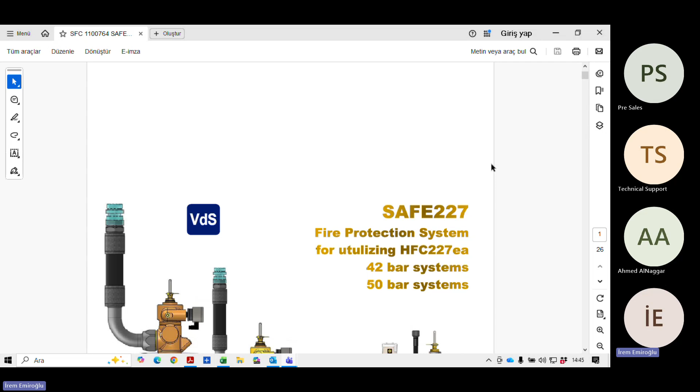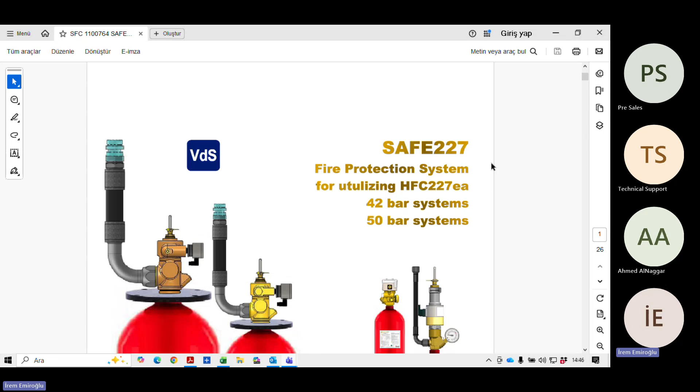This is our SAFE 227 system technical catalog. Actually, one of the technical catalogs with a certain product line, but this is the product line that we are going to work with you. We have our system approval with VdS, so in case you want to deliver the systems with the system approval, we will be able to supply you a VdS system approval.

Otherwise, we also have the same product line with UL approved components. However, in the UL case, we didn't receive our UL certificate yet, we will work on it. So we are not UL system approved, but we have the valves, actuators, and cylinders with UL approval, so we can deliver components approved products as well.

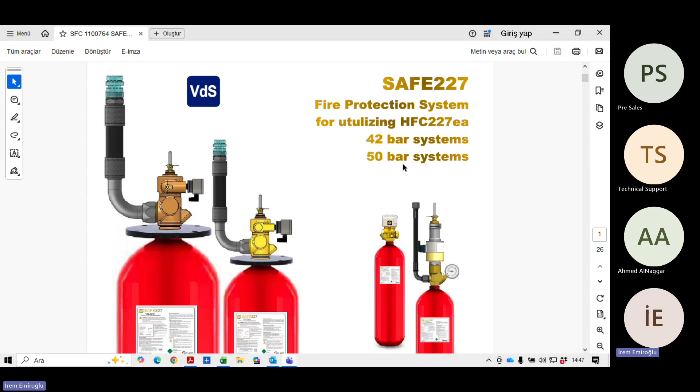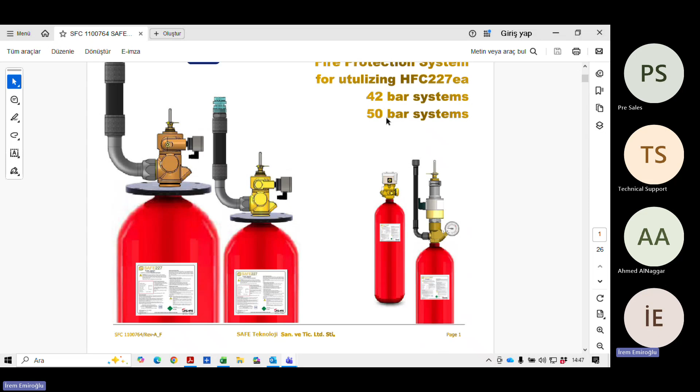But today we are talking about VdS system approved products line. So we have two different system approvals: one of them is working under 42 bars, the other one is 50 bars. We are working with high pressure seamless steel gas cylinders, meaning our cylinders are not welded, and we are not working at 25 bars working pressure - we are working at high system working pressure.

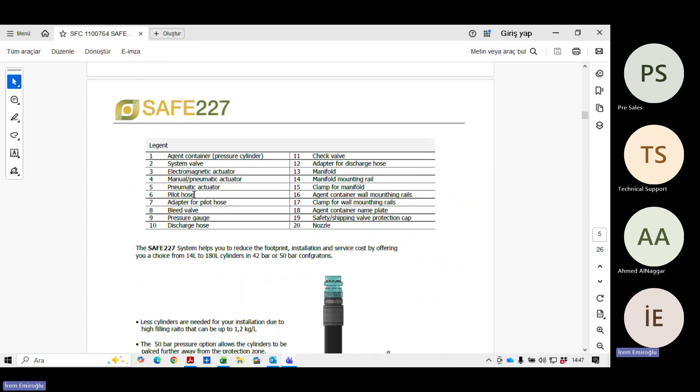So if you follow the technical catalog, you will find our system components here. And if you go a little bit lower to the 6th page, you will find our cylinder range. Our cylinder range starts from 14 liters up to 180 liters - so we have a pretty good and high range of cylinders: 14, 27, 30, 50, 75, 80, 120, 140 and 180 liter cylinders.

Here you can find the cylinder capacities as well. You can find the cylinder heights and the cylinder diameters here. We have different configurations with these cylinders.

As you can see, the 14 and 27 liter cylinders are our smallest system capacity. With this smallest system capacity, we designed two different product lines: one of them has the system valve with the electromagnetic actuator integrated, and one doesn't integrate the electromagnetic actuator. This creates an easy selection between two systems - I will explain on the bottom.

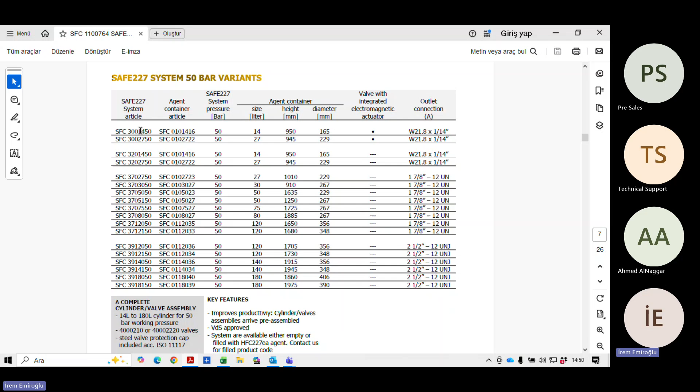In this page you can see the stock codes, the article codes of the cylinders with 42 bars system pressure, and we have the same product line for 50 bars of system pressure, same cylinders and same mentality I explained to you. But if you want to check together with the article codes and the system codes, you can always check from here.

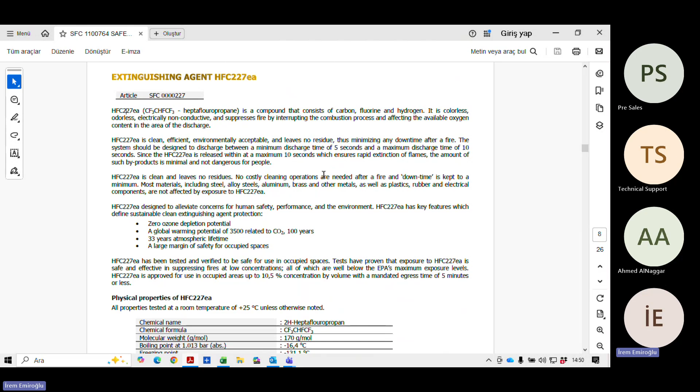If you would go through the technical catalog, you will always have the information about the extinguishing agent, but I'm sure you already know about HFC227ea clean agent. If you have any questions, we can talk later on as well.

For example, let's say for a 50 liter cylinder, on the lowest you can use 20 kilograms of HFC 227EA, but at most 60 kilograms of HFC 227EA. I find these quantities, the minimum quantity very minimum and the maximum quantity very high.

So this is not a safe zone to use. Instead, I would recommend you to always try to design the filling ratio around 80 to 90%, because I'm sure you also have a similar problem. When we are preparing a quotation, we don't have the architectural design of the hazard, and we don't know exactly where to locate the cylinder and how the pipeline will be. So we need to stay on the safe side, first trying to quotate for the system capacity. So I would never recommend to fill a cylinder even 100% or more.

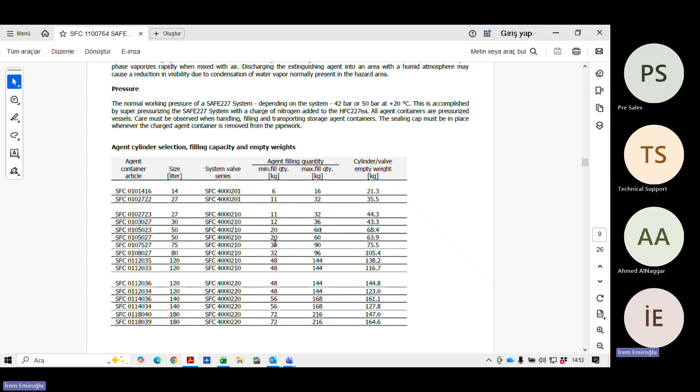This table works more if you know about the architectural design of the building, if you know more about how to locate the cylinder, and if the hazard is really easy to install with an easy pipeline. Otherwise, it would be better to stay on 80% filling ratio, which I'm going to explain you in the configurator part, but I hope you can also follow up.

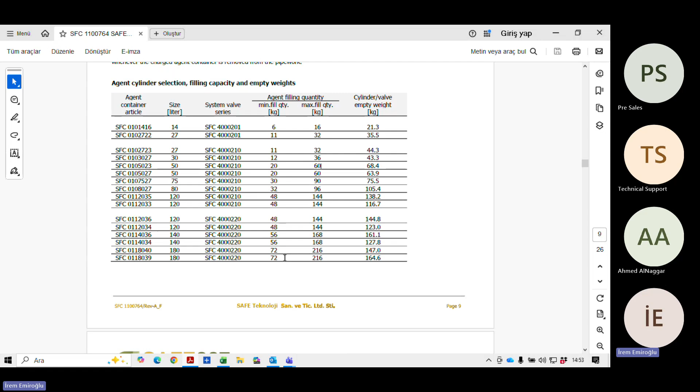I want to check if you still can hear me and if everything is going okay. Please give a heads up for me if you're okay. Everything is okay? Yes, okay great. Please ask me anything if you want to stop me.

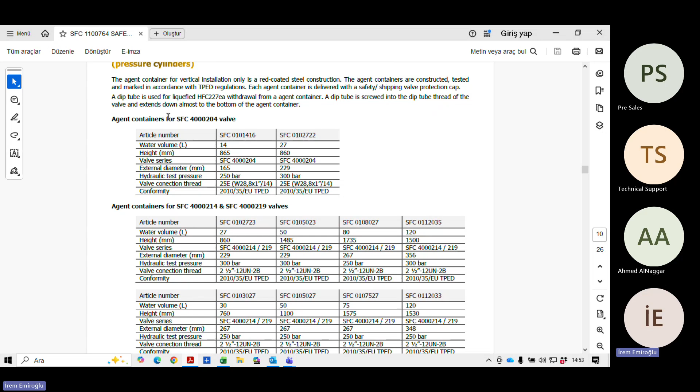On this page, you can find the agent containers and the agent container valve configurations. As I told you before, we have actually 3 different product groups. Let's say 14 and 27 liter cylinders. Here you can always see the valve connection thread, so you can understand that these cylinders have a very particular and small valve connection. So we are using a certain valve for this product group.

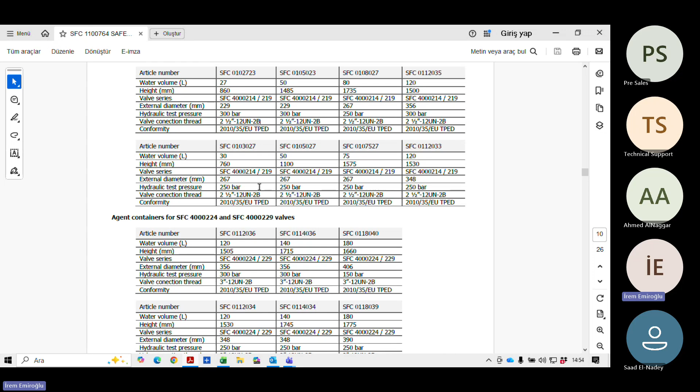Here on the second part, you can see the valve codes, starting from 27 liter cylinders until 120 liter cylinders, we are using the DN33 valve connection valves. And regarding starting from 120 to 180 liter cylinders, we are using the DN50 valve group.

I want to explain why we have so many cylinders in this chart. Maybe you noticed, for example, there are two 50-liter cylinders here. There is an 80-liter cylinder, but there's also a 75-liter cylinder, and there are two different 120-liter cylinders. With Mr. Ezat, we also worked on this, but I will explain you.

Under our system approval, we have different cylinder manufacturers. One of them is our own factory, which is CMV Cylinders Factory, a Turkish and Italian joint venture, and we are producing in our facility in Turkey. We are actually the main supplier of many system producer companies like JCI, Minimax, Rotarex, etc. We are a European cylinder manufacturer facility as well on the other side.

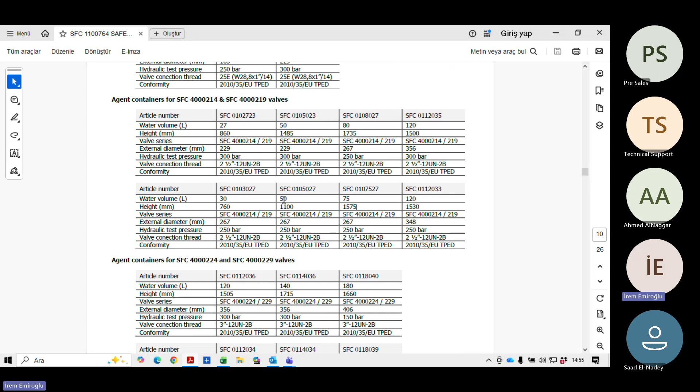So here you can see on the second line, CMV cylinder production line, as well on this valve group. Also, you can see on the second line, the CMV cylinder production group. On the first lines, here you see 27, 50, 80, 120 liters. And here you can see 120, 140, and 180 liter cylinders.

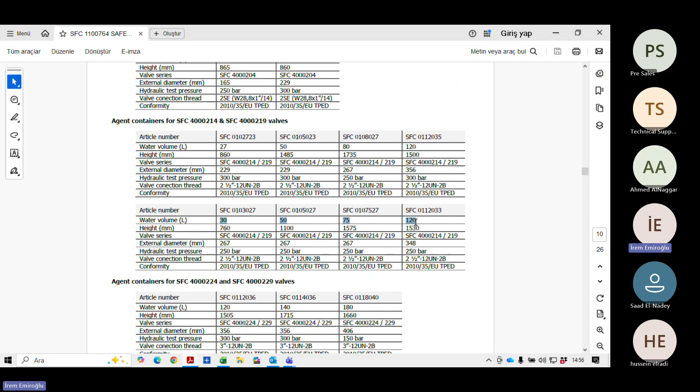This product group belongs to one of our Chinese manufacturers, a cylinder manufacturer, with whom we have an agreement for all our product groups. Because of customs tax and commercial concerns, we were talking about our own production line cylinders with Mr. Ezat. That's why we have so much cylinder capacity in our product group.

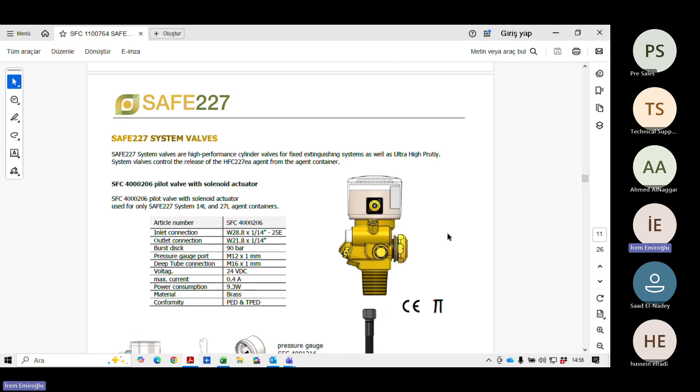Starting on page 11, you can find our different valve groups which we have talked about. Here you can see 14 and 27 liter agent containers, and the 25E thread connection valve product group. As we mentioned at the beginning, we had two different valve groups for both cylinders: one with integrated solenoid, and the other without solenoid integration, which was basically a discharge valve.

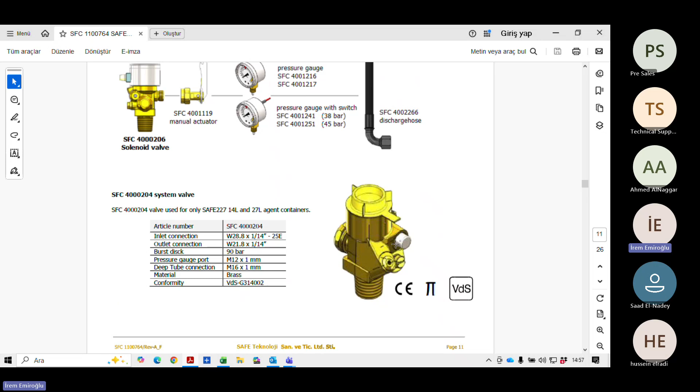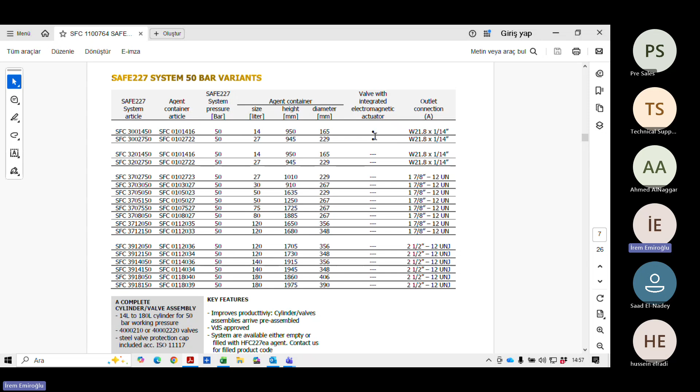I can remind you where I explained this at the beginning. I think you remember this part - I told you we have two groups with the same size of cylinders. One has the valve with integrated electric actuator, the other doesn't. So on page 11 you can find these two different types of valves: this is the one with solenoid integration, and this is the one without, which is under our VDS system approval.

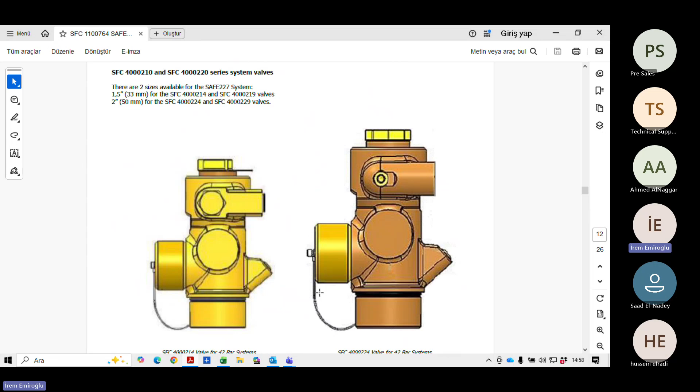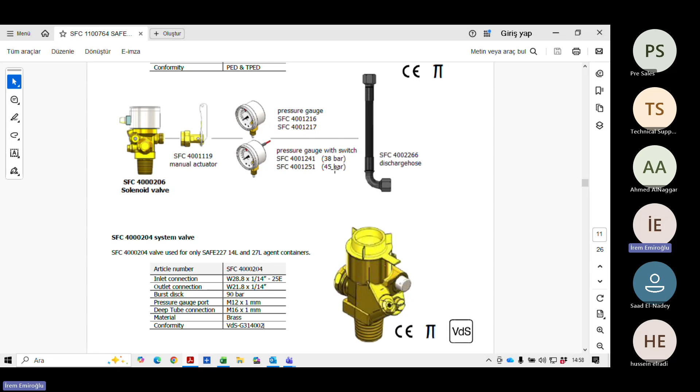Now let's talk a bit more about the configuration of this product. In case we use the solenoid integrated valve, we just need one manual actuator, and we need to decide between the pressure gauges. If we want a pressure gauge with contact switch, we can choose - we have two different contact switches, 38 bars and 45 bars. This one is for 42 bar working pressure systems, this one is for 50 bar working pressure systems. We also need a discharge hose to discharge the system.

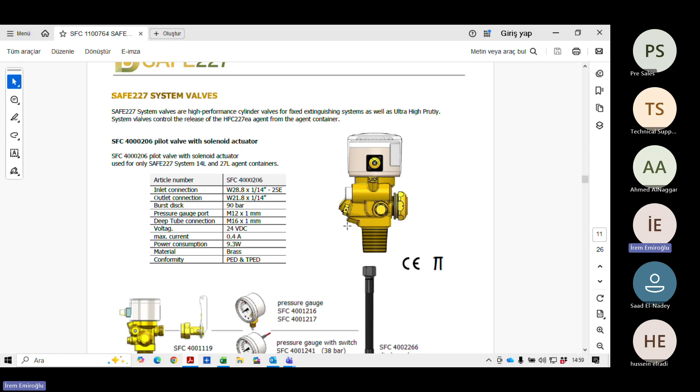If we want to use this valve - basically if we are quoting for a VDS approved system with 14 or 27 liter cylinder - it means we are going to use this valve, and we need to also add a solenoid actuator, which will be here on the lower part that I will explain. So let me go to...

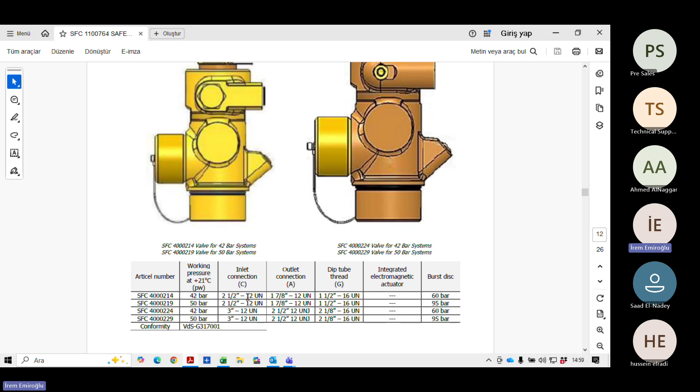the bigger cylinders configuration. As we discussed, we have two different working pressures, 42 bars and 50 bars, under our VDS conformity, and two different valve groups - one has DN33, the other has DN50 connection. Here you can find the DN33 and here the DN50 connection valve. This valve works for our 27 to 120 liter system capacities, and this one works from 120 to 180 liter capacities, so they are divided into different product groups.

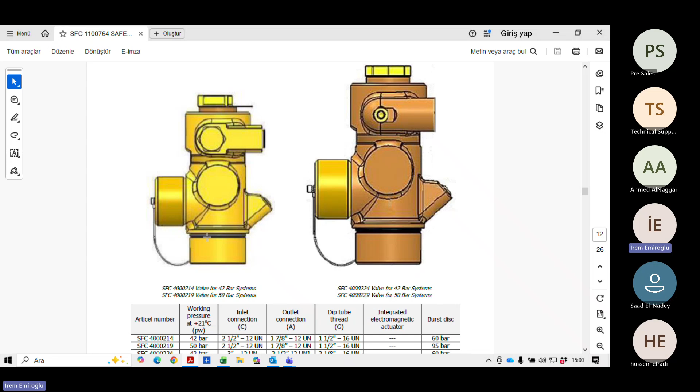As you can see, these valves are only discharge valves, so they don't have any integrated solenoid actuator. We are going to add a solenoid actuator for our pilot cylinders. Here you can see the configurations - this is page number 13.

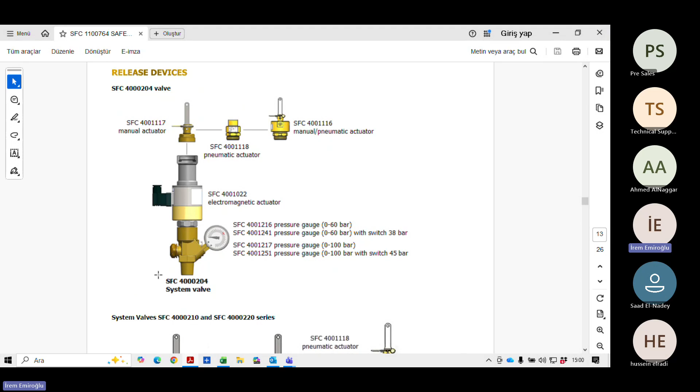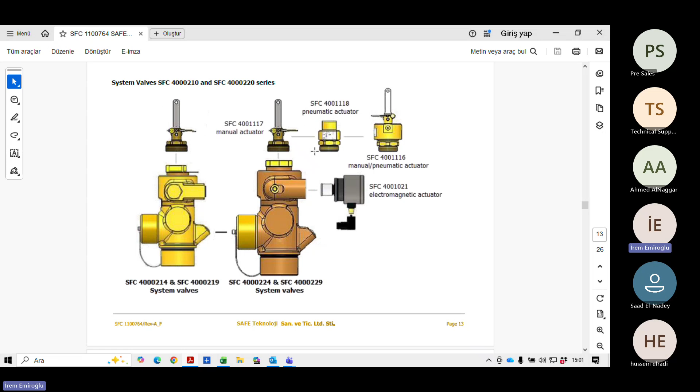So for DN32 and DN50 connection valves for the cylinders, we have the system valve and the manual actuator, which will be added on top, and we will have the electric actuator for the first cylinder under the manifold, under the battery - this is the pilot cylinder. Regarding the second, third, fourth, and other cylinders under the same manifold, we have the pneumatic actuator connection. That is basically the valve connections.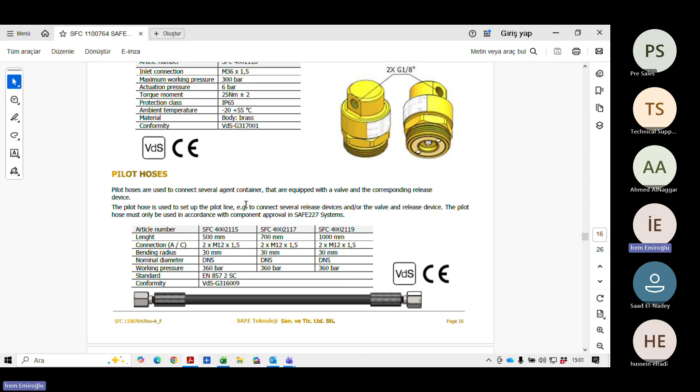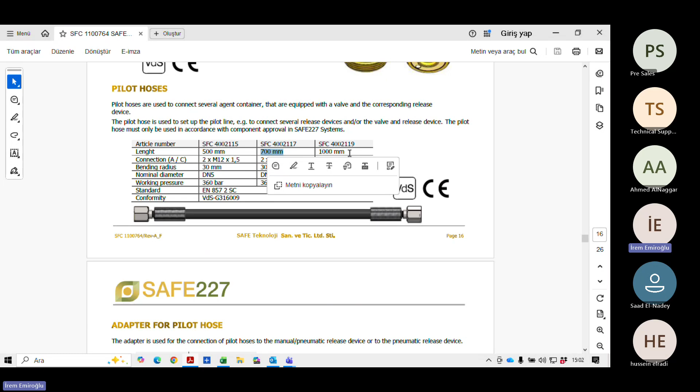Regarding the second, third, fourth, or however many other cylinders are under the same manifold, we will use a pilot line between the pneumatic actuators of the second, third, fourth cylinders. This is the pneumatic hose, which comes in three different lengths. This is suitable enough, actually - these longer pilot hoses will be required for different and specific situations.

So basically, this is what we need to talk about at the beginning. Here on page 18, you can find the detail of the pressure gauges that we talked about.

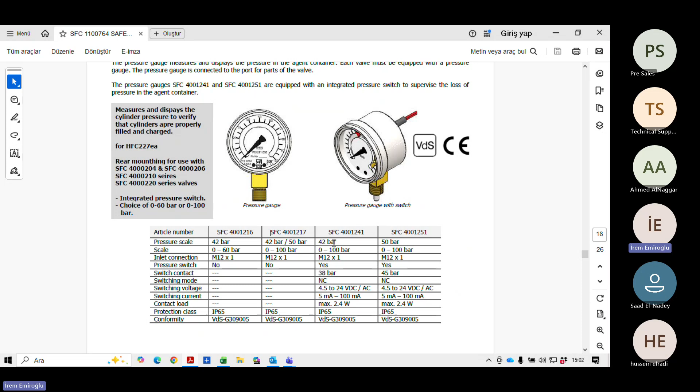For the 42 bar systems, you can find the pressure gauge alternatives here. The scale is changing, and regarding 42 or 50 bar systems, if we need to use a switch contact, you can find the switch contacts here, normally closed. All these product lines are also VDS approved.

There's a difference if you want to work with UL approved components - you always need to choose a pressure gauge with the contact switch. This is the necessity of UL. UL doesn't have the alternative which doesn't have any switch contact.

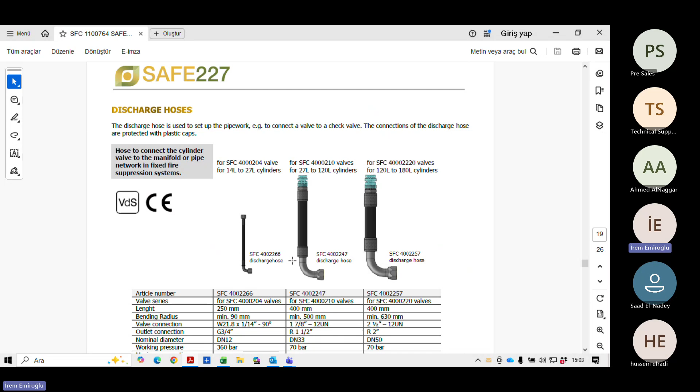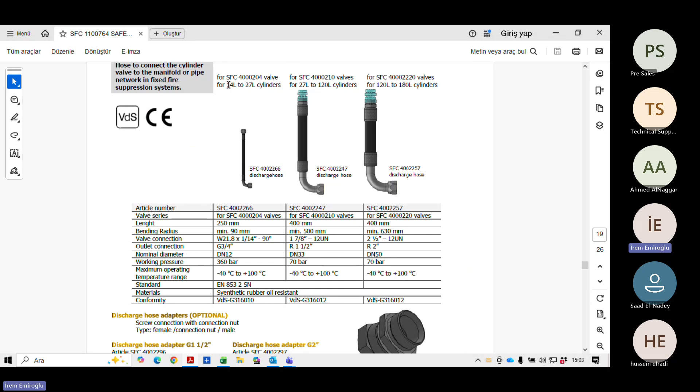Here you can find the discharge hoses. We have talked about 3 different sizes: DN12, DN33, and DN50 valves. As you can see, 14 to 27 liters, 27 to 120 liters, 120 to 180 liters. So 3 different product groups are here as well.

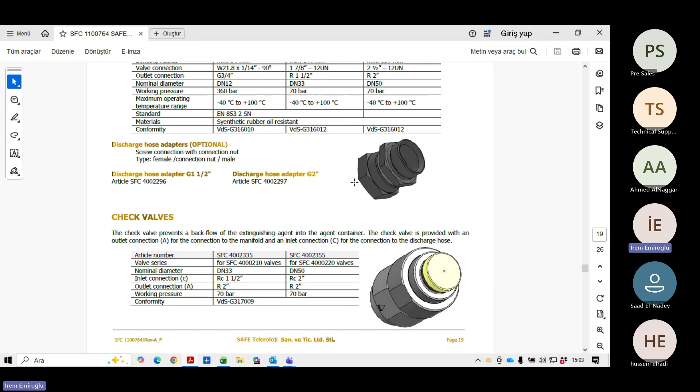We have different manifold configurations. Mr. Ezat told me that you're not going to purchase any manifold groups from us, but you can always check from here. We have different alternatives we can use for 2-port, 3-port, or 4-port manifold groups.

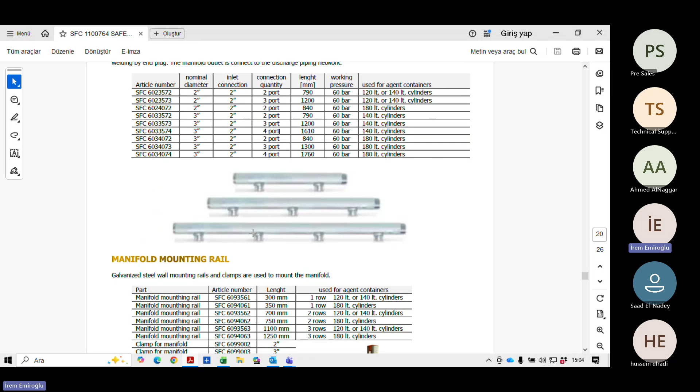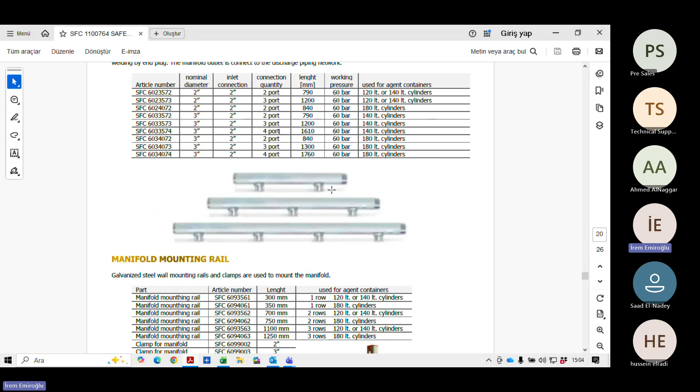If we need to install 8 cylinders in one hazard, then we can use 2 pieces of 4-port manifold, or we can use 4 pieces of 2-port manifolds. It depends on your design, on the architecture of the hazard, depending on the pipeline that you would easily install. You can decide, or we can support you technically.

You can always find which manifold connection is going to be used for which type of cylinder groups here.

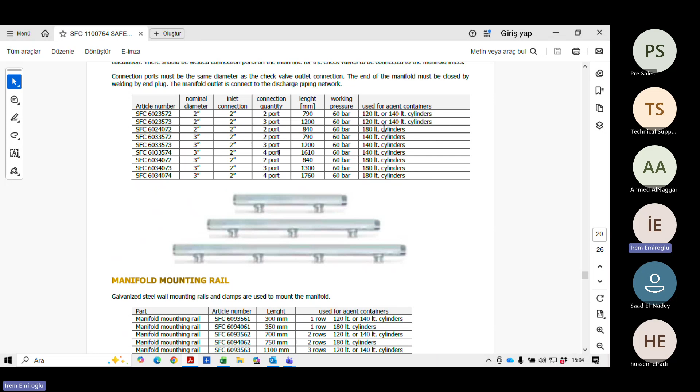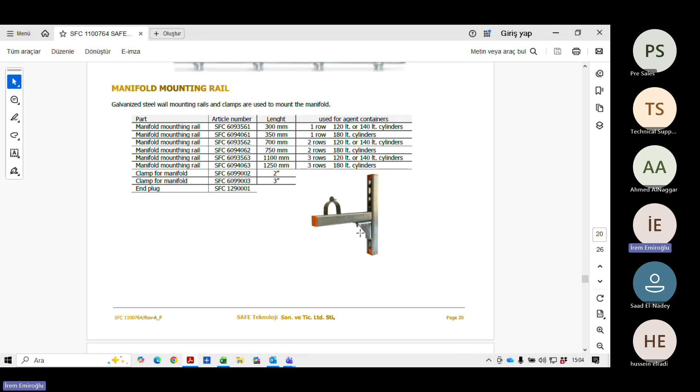Here you can also find the mounting rails for the manifolds to mount on the wall on the upper level of the valve outlet connections, but you don't have to purchase this group from us as well. We already talked about this. We have the agent container mounting rails.

Since we are working for high pressure gas cylinders, we always have to install the cylinders and fix them to certain walls instead of any separator or construction that is not strong enough, because the pressure we are working with is really high. It will become a hazardous product if we don't make the wall fixing correctly.

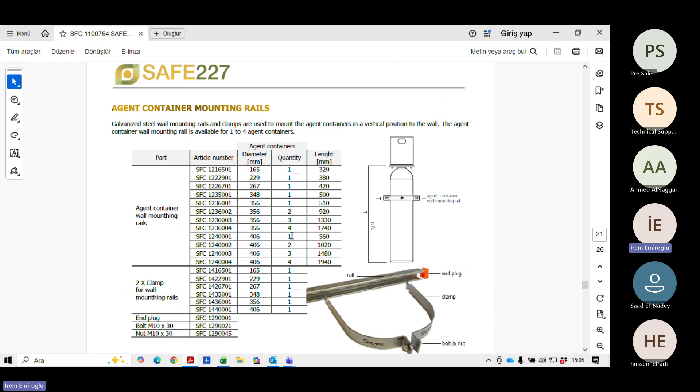Here you can find our wall mounting rails and how to configure them. In case if we have one cylinder, this is the length of different types of mounting rails. And if the number of cylinders is more than 1, up to 2, 3, or 4, you can see the length of the mounting rails here as well. We can explain more when we configure it.

Here you can find the nozzles. We have 2 different types of nozzles under our approval. One of them is 180 degrees. The other one is 360 degrees.

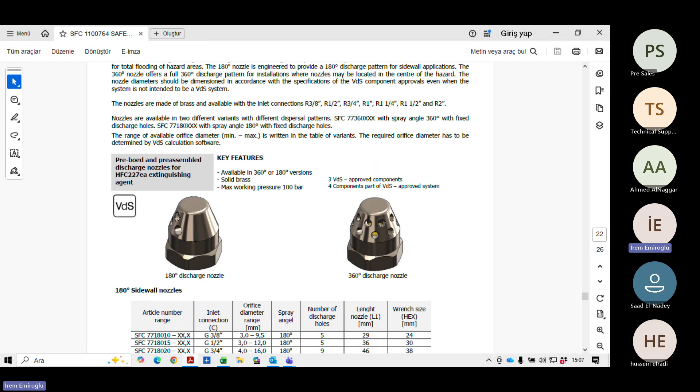This is basically the nozzle used in the middle of the hazard ceiling, which will enable the gas distribution homogeneous in all the hazard, let's say. But in case if you require to install the pipeline on the wall, and if you need to leave the nozzle connection on the wall side, this nozzle means the wall side nozzle, so there is only the 180 degree side which has the holes, which means the gas will be discharged in one direction instead of the other nozzle type. We use this nozzle a lot in our projects as well.

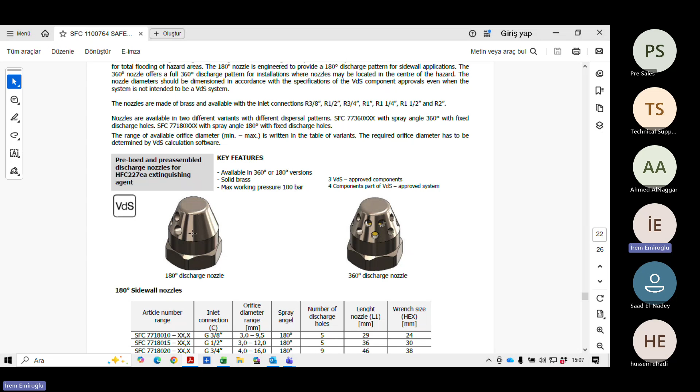This is a really nice option that we can be more flexible about our pipeline design. So these will be the optional products.

Here you can find the system label and explanations that are on our system label. Regarding each system capacity, the cylinders are delivered with an inner label explaining the filling location, filling date, and filling quantity in terms of kilograms, as well as temperature and the working pressure of the system.

We have a really good fixing of our labels, so this label is never affected by water. It's waterproof. It's not easy to relocate, so it's really sticking on the cylinder, and the inside part is under protection of the label itself.

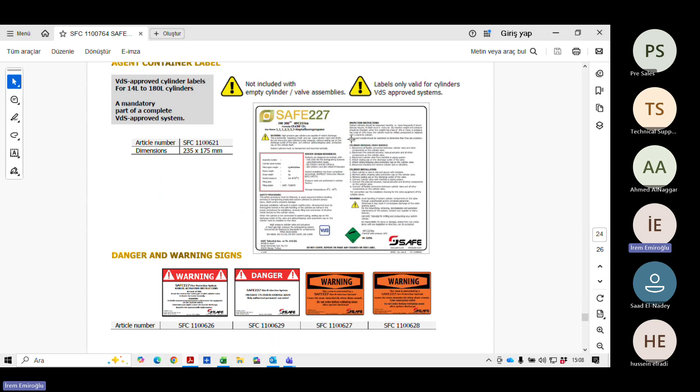We have 4 warning signs. You can use 2 of them, you can use one of them on the room door. So it's basically giving a notice that the room is protected with the system and you shouldn't go in, or you shouldn't keep the door open.

There is another warning sign which should be located somewhere close to the manual actuator of the cylinder, because it's explaining how to use the manual actuator in case if fire detection is not working correctly or something happens - you can always manually actuate the cylinder. So we also have the cylinder room label, and we have different warning labels regarding how to use the emergency exit.

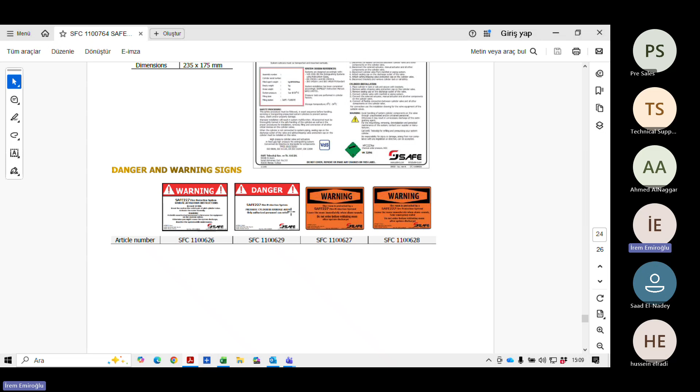Basically, this is the technical catalog. You can go through it after our training to understand a little bit more.

So we have this very basic Excel file that I will try to explain to you. Actually, if you prefer, after I explain this, maybe you can create your own design table as well, but this would give you an insight, I believe.

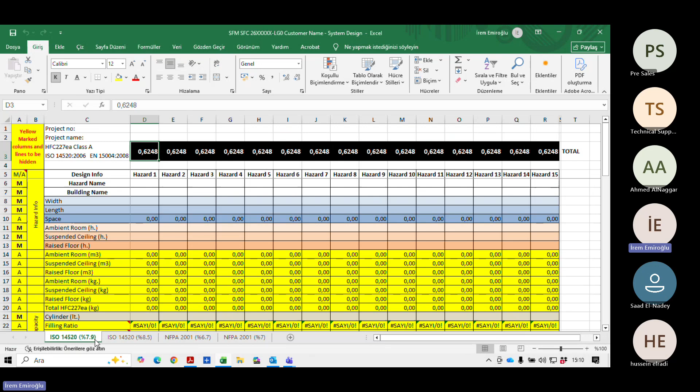I think in your country you are working with NFPA design criteria, but we are responsible for ISO EN standards as well. So we have ISO standards and NFPA in this Excel sheet, and whichever you prefer, you can use.

I will use NFPA 2001 with 7% extinguishing concentration of a project. So here you can find a very basic calculation. I'm going to try to explain you from some examples.

Let's say if we have a hazard, which is an IT room, in the X5 building, let's say. So this room is going to have 3 meters in width and 6 meters in length, so basically it's 18 square meters, and it has 3 different heights, which is the ambient room height.

Will be 3 meters, and we have a suspended ceiling above the ambient height, which is, let's say, 1 meter, and the raised floor is going to be 0.70. In this case, this Excel is going to calculate the cubic meter of these different volumes.

So ambient room cubic meter, suspended ceiling, and raised floor. And then it's going to calculate how many kilograms of gas is required in these volumes, in kilograms measurement.

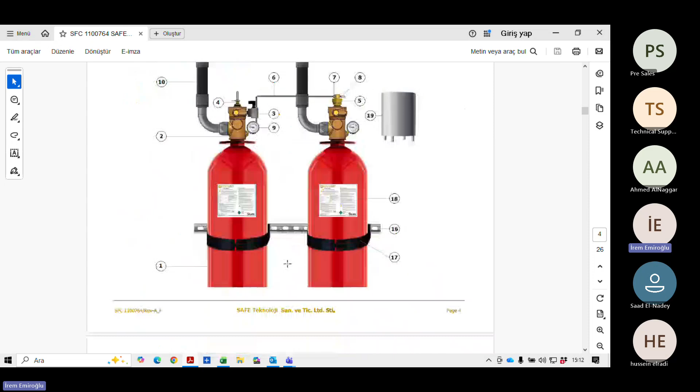I go to the same cylinder table. Is everything okay? Can you follow up? Do you need me to slow down?

No, it's okay. So you always need to go back to the cylinder range, product range, and you need to decide in which cylinder you should fill this gas quantity.

So when you check the cylinder alternatives, you need to choose either 50 liter, 75 liter, or 80 liter system cylinder here. So let's choose the 80 liter system cylinder to fill.

Here you can find the filling ratio. So if we are going to fill 46 kilograms into an 80 liter cylinder, it means that we will fill around 58% of this cylinder. So we need to make a correction here, because when we calculate the system capacity under VDS hydraulic calculation regulations.

We need only 2 points after the separator. So it's always going to round up, and it will always try to calculate the gas quantity rounded up. So it will not be 0.5797.

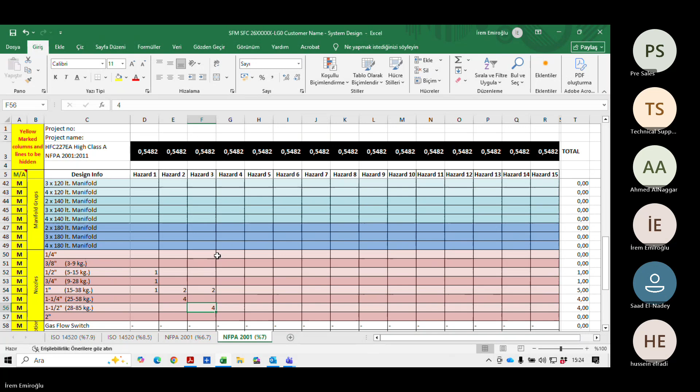We can do this together. For the raised floor you can use this, and for the ambient you can use that. If you require me to continue with more hazards or examples, we can continue. Please lead me about this. Okay, no, I think thank you.

I'll just tell you about the question Engineer Hussein raised. Is this the only way you are using to calculate the system needs and the calculations, or do you have any other software for calculation?

Yes, actually, this is the entrance of design. We are calculating just to give a system quotation and determine the system capacity of the hazard. So once the system capacity is determined, then you need to make hydraulic calculation, and after the hydraulic calculation, you need to make the project drawing, and then of course the manufacturing and the filling.

So there is a VDS approved software that is licensed to our company, which has the library consisting of our cylinder product range, our valves, and our nozzles. So when we enter any project info into the VDS software, project by project, we receive the hydraulic calculation report on the system quantity, the system capacity, the cylinder selection, the nozzle selection, and the pipeline. That's the engineering part of this design.

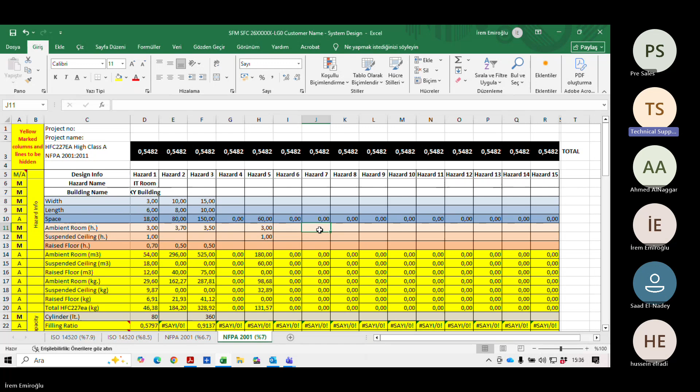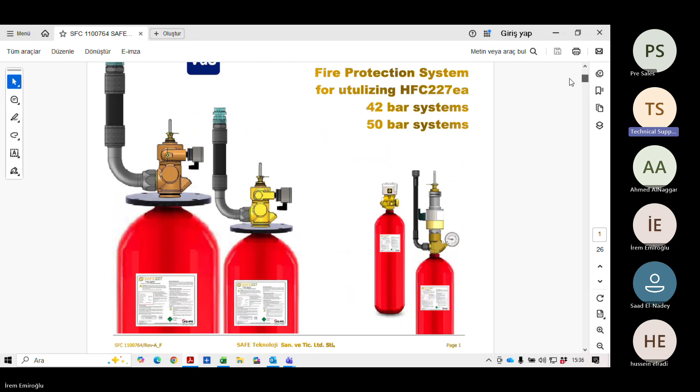Yes, yes, okay. My next question regarding, I found that at the beginning we have two types or two configurations of the actuators or the valves on the cylinder. One is the integration or completely integrated packaged actuator, electric actuator with the manual actuation, and the other one is just the valve, and you can insert the actuator.

What is the default we can get? I think by default we get the one integrated, both in one. Yes, by default we get that in offers.

In case you need VDS system approval, we always quote you this product because this valve has VDS approval, and the solenoid actuator and the manual actuator as well. The product integrated with the electric actuator, this valve is not VDS approved.

So this is also in our product range because this is a really cost-effective product, cost-effective because the valve has the integrated actuator. But in case you don't require any VDS approval, you can always use this alternative. It will create cost effectiveness.

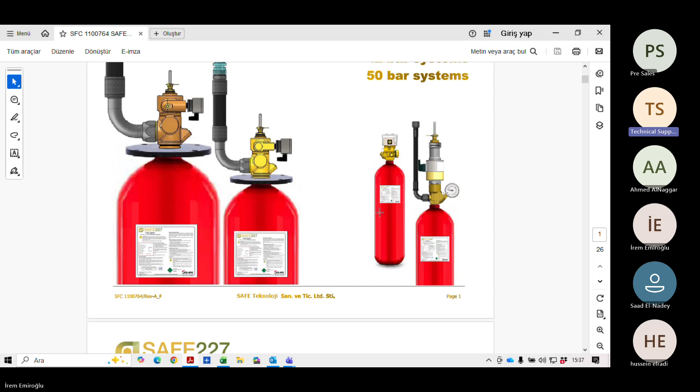Okay, my last question regarding, I found that, just give me, the pressure gauges mentioned. I found it, which is on page 18.

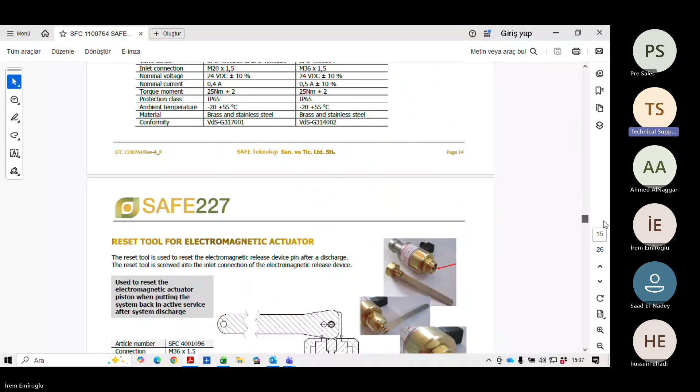Okay, what is the approach we are using to select? Yeah, okay, I understand. Thank you.

So let's say you don't require any switch contact. Your customer is going to make visual control regarding the pressure of the cylinders, and they don't want your fire detection system to receive any signal from the pressure gauge or the pressure drop. This is possible. So in that case, you only have two alternatives.

Here you can find the first and the second pressure gauge. On the first alternative, you have the scale up to 60 bars. This scale can only be used for 42 bar systems.

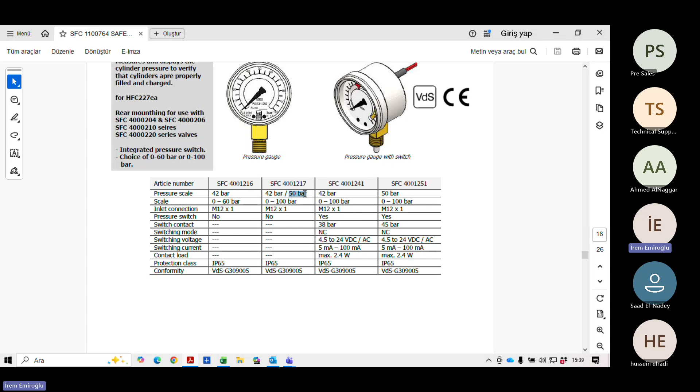So if you are going to use a 50 bar system, or if we are going to calculate the system for you, and in the hydraulic calculation part we decide that we should fill this system with 50 bars instead of 42 bars, then we are going to use this manometer, which has the scale up to 100 bars. This is the difference between them.

And regarding the switch contact pressure gauges, you can find two different pressure gauges. Both of them have the scale between 0 to 100 bars. There is no difference, but there is a difference in the contact points.

On the scale, this pressure gauge has a contact point here, you can see in red. This contact point is 38 bars. So the pressure gauge has the electrical cable, and this cable is going to go to the relay on the fire detection panel, conventional panel.

There's an input in our panels which is controlling the normally closed contact, and this contact gives a label information which is called low pressure on the fire detection panel.

So when the system is pressurized to 42 bars, with a 10% pressure drop, it will drop to 38 bars. The standards don't accept more than 10%. It means there is a problem, maybe there's a leak on the valve, or the system is discharging slowly. We don't know why. Maybe there's a problem, we need to check.